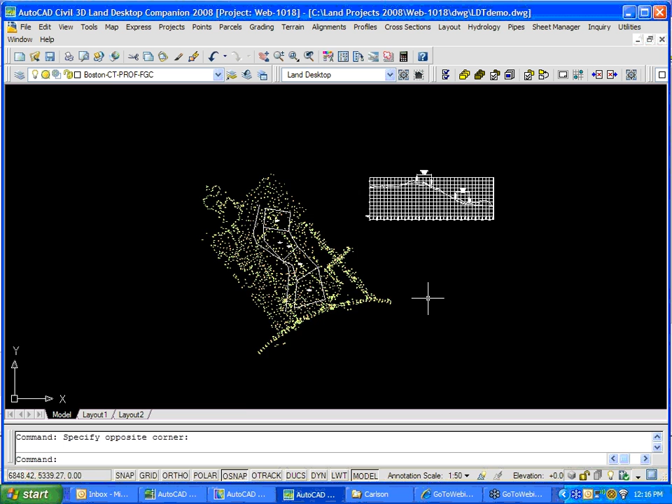Let's proceed. Where I'm at right here is in Land Desktop. I used to be Professor Landnut and spent a lot of time here and enjoyed it, but have moved on, and here is a typical data set. Very simple, but typical. What I've tried to do is represent some data, so you see the points on the screen.

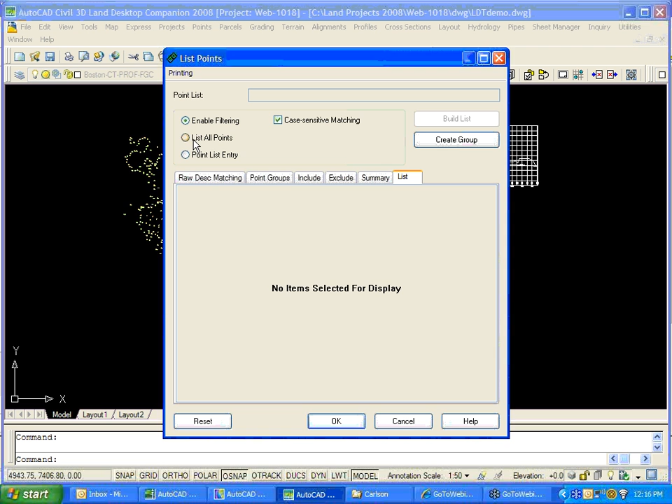If I say list points, and we come in here and say all points... okay, we're doing okay, list all points. So here's our point data.

Surfaces, we go to Terrain Model Explorer. I guess I'm still Professor Landnut, I guess once you're Professor Landnut, you're kind of always Professor Landnut. But anyway, bringing up Terrain Model Explorer here. A little bit of a delay because of all the applications I have running, but come on, you can do it, don't let me down.

There we go. Okay, so here's my EG surface. It's existing ground surface built from a point group. No problem. I have an alignment here that I put in the drawing. You can see this alignment that I put through.

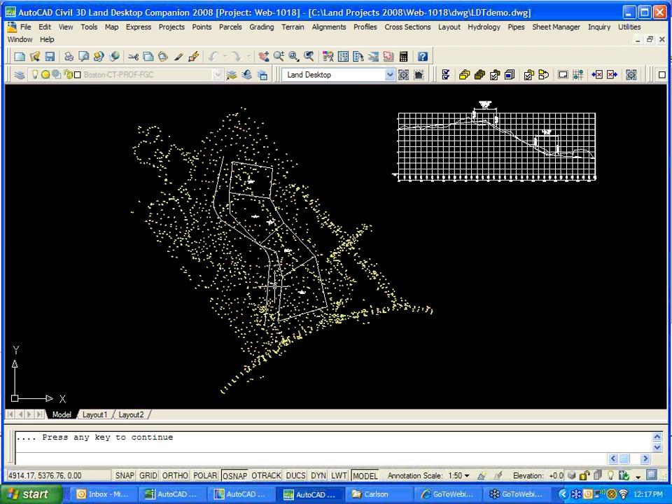Let's see, how do we list that? We say alignments, alignment commands, list defined. So there's a couple, Boston and Boston 3. We're going to go with Boston 3. I've got some parcels here, and again, let's see if I can do this.

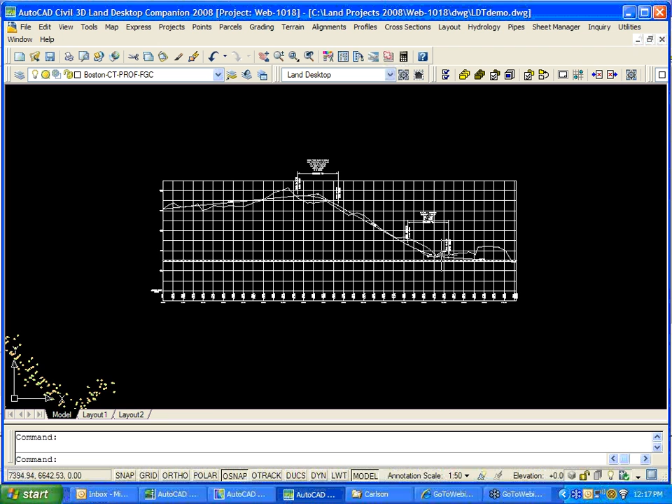Parcel manager. A little rusty, but there's my parcels, 3, 4, 5, and 6, they're numbered. And for the road, we have an existing ground and a proposed finished grade profile. So quite a bit of work that's been done here.

So here we go, here comes the magic. Coming out of Land Desktop on the project menu, Export LandXML. And we go to the LandXML export. It says I'm looking in the Land Desktop project, and I'm seeing points, the number of points, surfaces, 1 surface, 4 parcels, a couple of alignments, and I've gone ahead and said go ahead and include the profiles with the alignments. So that's all the data that we're going to be writing out.

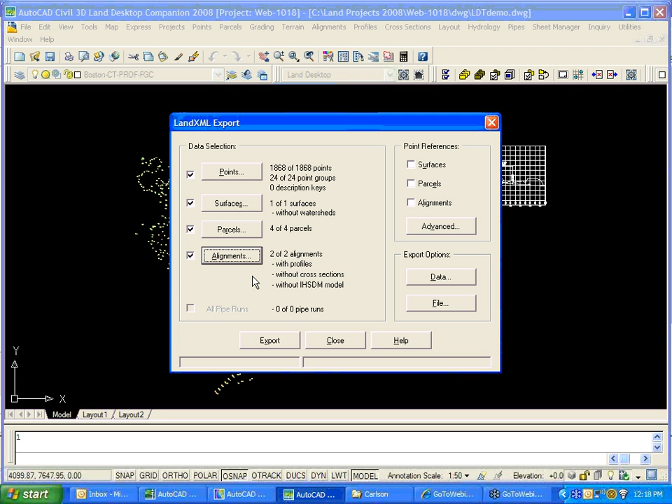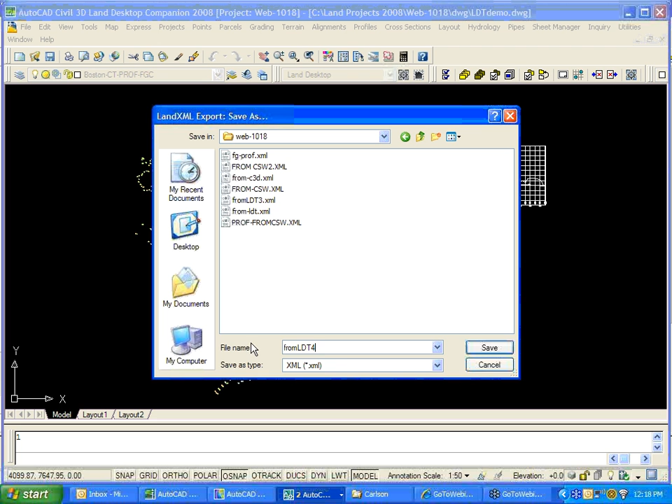So let's go ahead and say export. It says, okay, we're going to write an XML file. I'm going to go ahead and put it in a real easy place to find on my desktop. I have a Web 1018, and I'm going to call this thing from a Land Desktop, and I'm going to do number 4. I've been doing some experiments here, so let's go to number 4. This for this new one, running everything live.

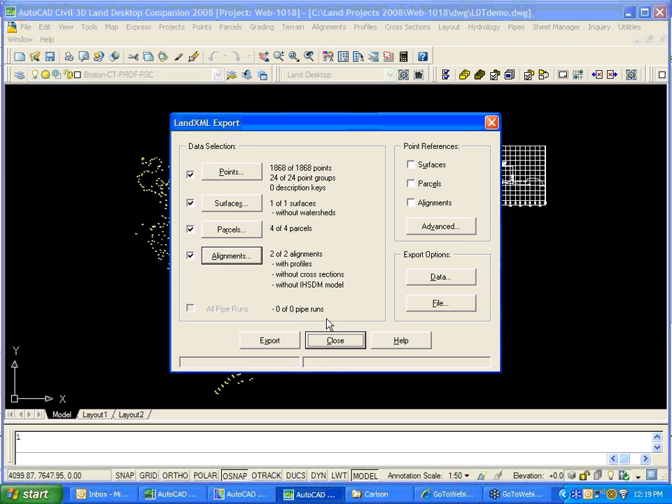For your viewing pleasure here, to make sure that this is all real stuff that's happening. Of course, we could face disaster, but we're brave, so we'll continue. So there it is, we're done. It's exported the file, and we close this dialog, and there we are. There's step 1. So any project you have in Land Desktop, there you go, there's all your data coming out of there.

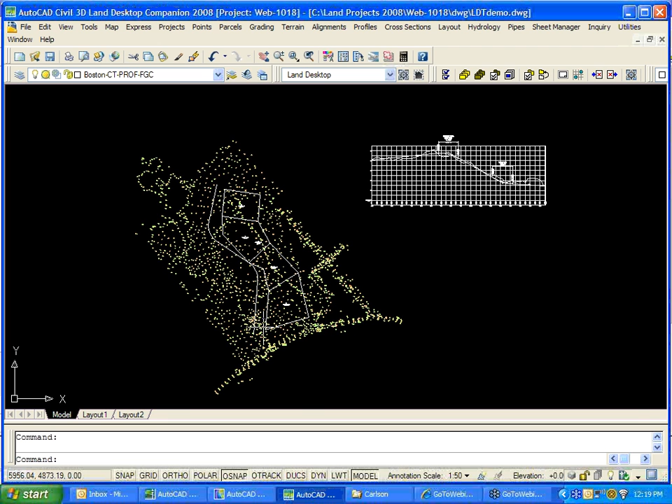Now, in addition, in Survey, let me jump over to the Carlson now, which is right here. A few things I want to point out before I actually bring in that file. First of all, in Carlson Survey, I'm just going to switch to Carlson Survey for a moment, there's a couple things I want to point out.

One of them is edit process raw data file. When you're working with raw data, survey data, this is extremely important here, is in the editor we have import and export. So you can see, I'll leave this up there for a second so you can see it, is just basically a veritable plethora of formats of raw data that we can read, of course, including the ever popular field books. So in talking about survey data, if you have an FBK, bring it right in. It goes right into our editor, into our format, which is an RW5, and you're off and running.

And of course, we can bring Land XML, survey raw data, and you see the list of all the others. By the same token, we can output a field book, export a field book, we can set up field book codes and so on, and we can export raw to Land XML, and so on, TDS format, whatever you're working with. So I wanted to point out there, major on the topic of conversion, this is a major feature, major thing to be aware of, is your survey data.

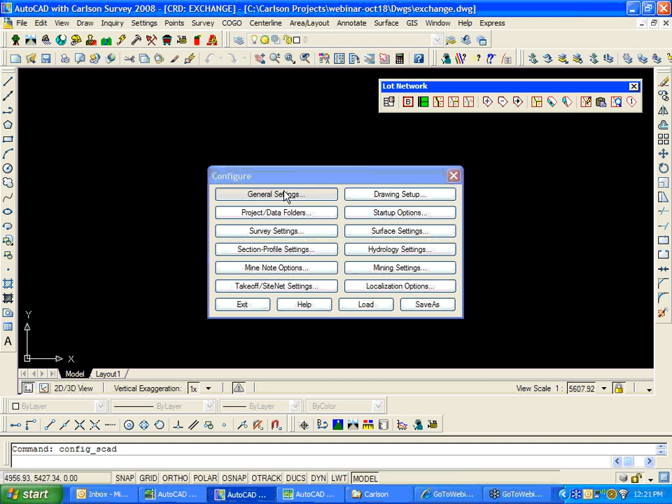In addition, there's a few other things I wanted to point out. Now, in Carlson, if I go to my settings, Carlson configure, and I go to my general settings, we have up here coordinate file format, and it defaults to our Carlson numeric only, which is a CRD. We call it a CRD, coordinate file. But you can actually run Carlson reading and writing to a Land Desktop points MDB. So if you wanted to just stick with the Land Desktop points MDB, that's an option that we offer to you, and you can just be reading and writing directly into that format.

Down here, by the way, now I'm running on top of maps, so the menus that are available are map menus. But if I was plugged into Land, or if you plug Carlson into Land, you'll see your Land Desktop menus. Or, of course, if you install on Civil 3D, you'll see your Civil 3D menus available, and you can just switch menus and go to town.

Another thing I wanted to show is under our points menu. Again, we're talking about points a little bit more. We have just an extensive list of converting formats from one to another. So here's a Land MDB to a CRD. You just pick the MDB file and make it into a CRD file that way. We can take Land Desktop points and make them Carlson points. You have the Object Enabler installed. You open a drawing, it has contours and points. We can turn the land points into Carlson points.

On the surface menu, we can, where is it? We can convert, there's that import, export surface data. Here's convert Land Desktop contours. So again, if someone's using Land it might not hurt to just maybe explode those contour objects or create them again as polylines, but you don't even have to.

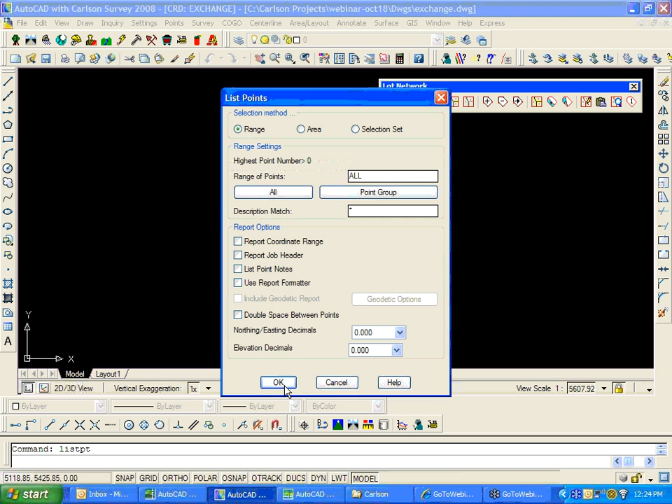If I look at my points, I say list points, all, and of course you see there's no point data. And there's no surface, there's nothing. I just created this right before we started, and it's empty. So let's bring it in, and let's see how this goes. So we're going to go to the File menu, and we're going to say Import LandXML Files, and we're going to import from LandXML, and it says, where is the file?

And again, I put it up there on my desktop so I could find it easily, so let's go up there on my desktop, Web 1018, from Land, number 4, the one we just made. It kind of shows me a preview because of course it's a text file, so all that stuff's there. So let's go ahead and open it. And we're being prompted for each file name. It shows you what data is going to come in. Okay? And point protection is on. That all looks good. Let's go ahead and start the import.

It says, what coordinate file are we going to be writing our point data to? And we're just going to use our current existing CRD, which is Exchange. We could also make a new CRD. One of the beauties of Carlson with point data is the ability to work with multiple coordinate files.

So if I wanted this data coming in to go to a new coordinate file and not add to the one, let's say I already had points in this one, but I want to bring in some more, but put them in a new one for safety purposes, I could make a new file. But I'm going to go ahead and bring them into this existing one, which again is empty. So I'll bring it in, and it processes the point data.

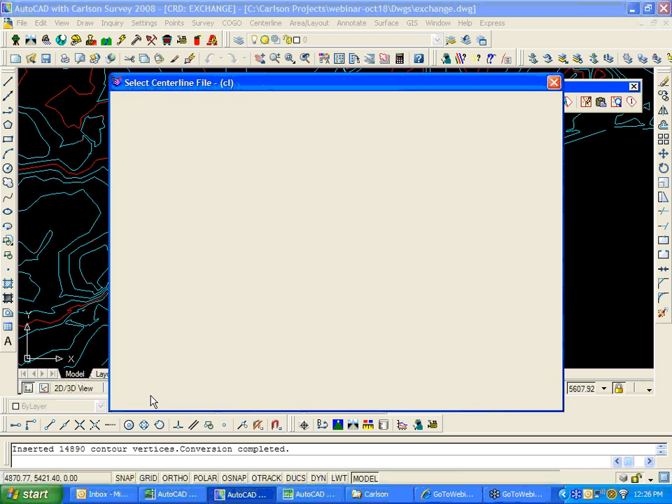And here comes some more data. So this is the other centerline file, the first one I had tried, which is just called Boston. Let's just use it. Let's just leave it alone. We're not going to go ahead further with that one.

And here comes our profiles. Again, Carlson stores these as a .pro file. So here's Boston 3, and this is existing ground. So I'm just going to change that name to Boston 3 hyphen existing ground profile, okay? And now it looks and it says I see one more, and it's the finished ground, Boston 3 finished ground.

So let's go ahead and take out all this extraneous stuff with the parentheses, which scare me a little bit. I actually tried it and it works fine, but special characters like that over the years, going back to the DOS days, those of you that were there with me back then, those special characters kind of give us nightmares, so I still avoid them. Old habits die hard. So Boston 3FG, and it processes that,

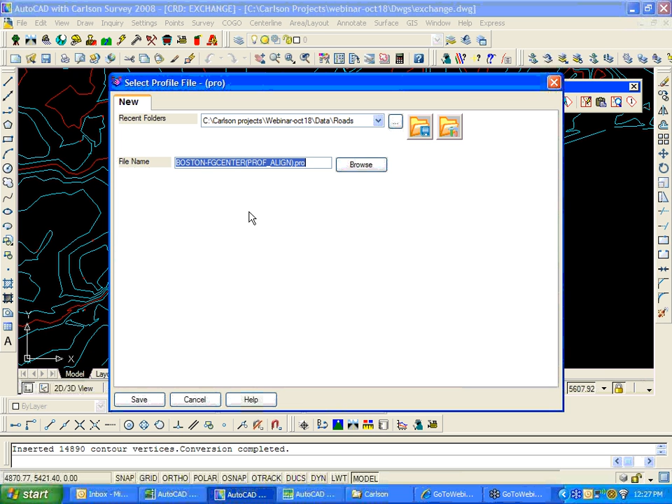and it says, okay, here's the center line for this other road, Boston. I'm just going to leave that one because we're not going to use it. Anything else? This is that finished grade for that other center line. And I think we're all set. So here we go. So here's our surface. Let's look at our point data first.

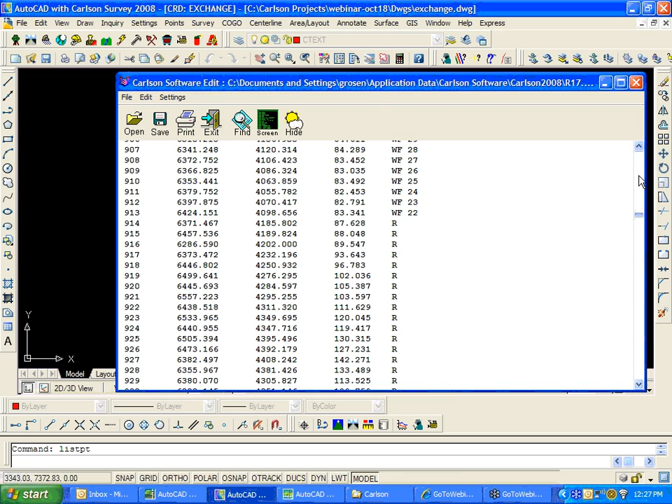We go to points, list points. I showed this just a moment ago. I now show you all the points are here. Came through just fine. There's some center line shots. Proposed center lines at elevation 0 because they're just proposed stakeout, but that's fine. Points are there. You can see the contours obviously are all set. Well, they even got labeled for us, which is kind of nice.

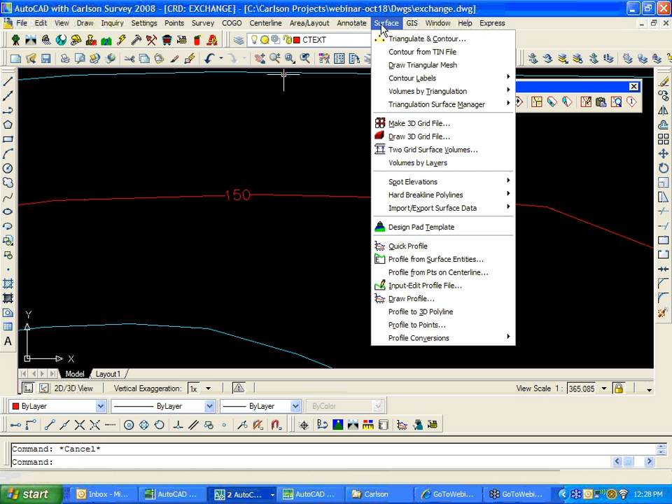Text. We have just standard text for our labels and standard polylines. This is kind of cool though. If I say on the surface menu, contour labels, and I say move along the contour, and I pick this label, and it slides along the contour. I just had to show you that because it's pretty cool. And again, this is with a standard AutoCAD text and a standard AutoCAD polyline. There's a little wipeout behind the label, but there it is, and we're all set there.

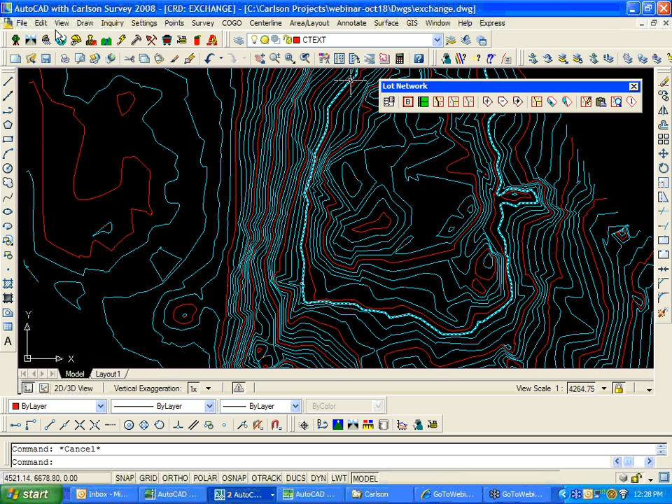Let's take a look at the surface, make sure it's real. I'm going to switch over to Civil at this point. I know the menu's a little bit better. We'll go to 3D View, Surface Viewer, and EG410. And let's take a look. There it is. Okay, so there's our nice surface. Came through just fine. Nothing to worry about. Okay, so let's see what else we have.

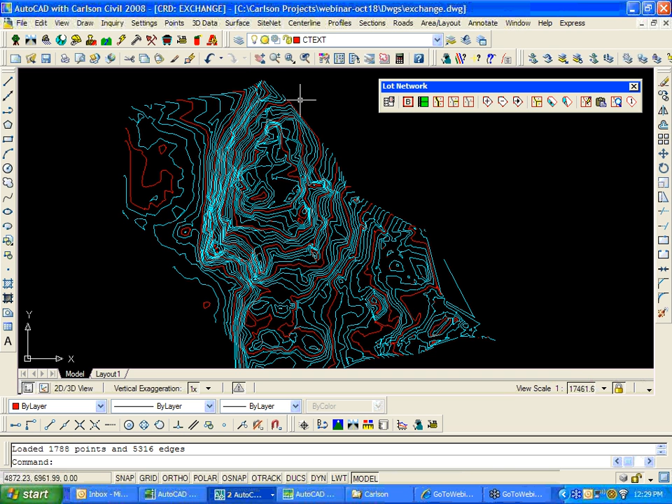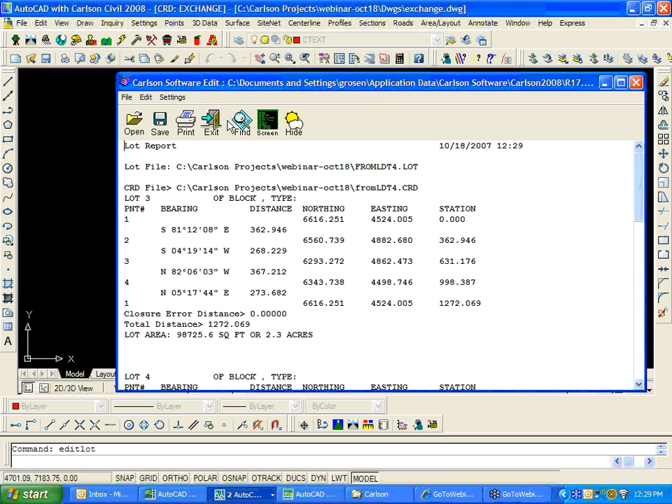We have parcels. Let's look at those. We'll go to our lot file manager, and we have an existing lot file from Land Desktop 4. It's an LOT file. We open it in our manager. Here's the lots. I could select them all. Let's do a report. Okay, here's all the lots with their data, bearings, distance, everything. And let's go ahead and draw them in our drawing. Draw polylines, label. Let's label everything. Why not as it comes in? Say OK.

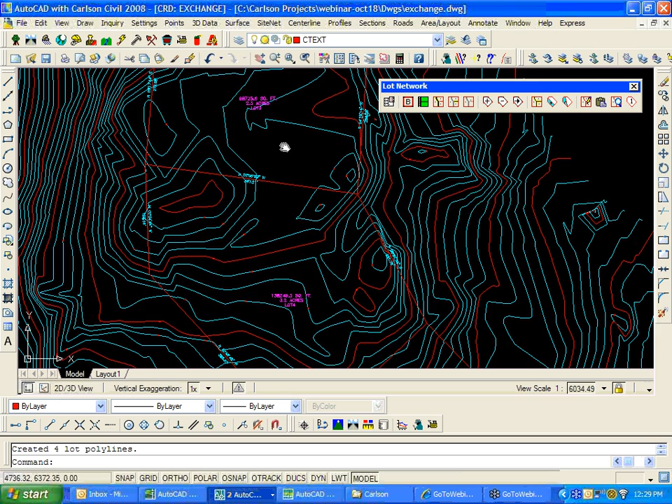And this is for the line labels and the lot labels. And we'll see those in here now. Okay, so here's our lots came through with the labels and the bearings on all the lots. So now our lots are there. That's no problem. Those came through. Let me go ahead and I think I should freeze these contours. Might make things a little easier to see. Can I do that? Well, yeah, I guess do that. Just so you can see the parcels a little better. What else did we have?

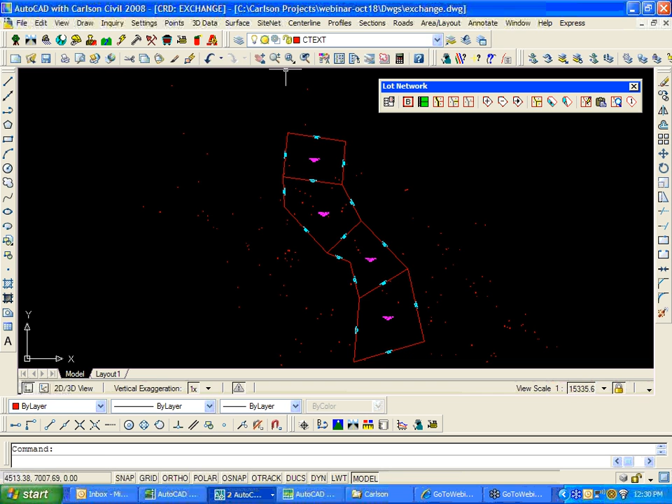Center line. Let's draw out the center line file. On layer C line, Boston 4, there's the center line that we created. If I double click on it, Carlson recognizes that polyline's a polyline, but it has data that tells us it's more than a polyline. So there it is. I have my editor. And then let's draw, we have profiles too. So let's say draw profiles.

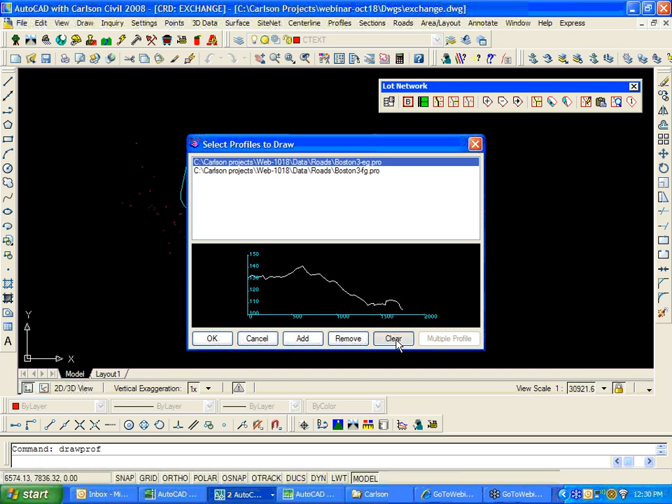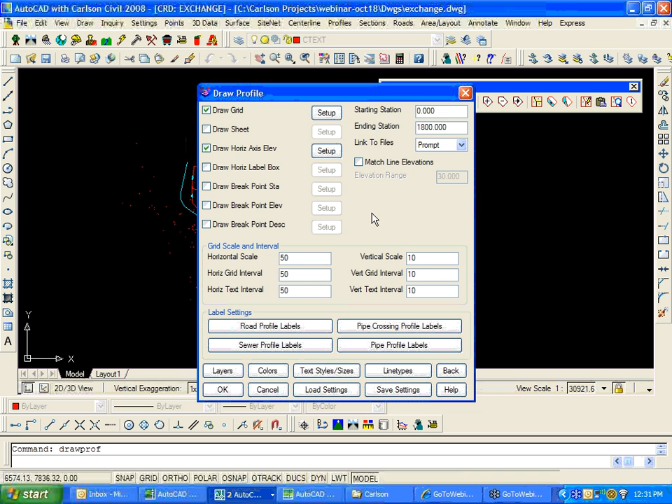And I'm going to clear this and add, let's see, where are those? Boston 3, yeah, Boston 4. The center line, I didn't change the name. So it's this one, and here's FG. So here's the existing and proposed, and here's how we set everything up, all the details, 50 and 10, and grids, and so on. I'm not going to go into those details right now. Minimum, maximum, and so on. We'll draw that on the screen. And there's our profiles generated.

So there you go. Everything really just came through flawlessly, and that's just the way it works. I'll go ahead and save the drawing. So coming from Land, that whole data set comes into Carlson, and we're all set.

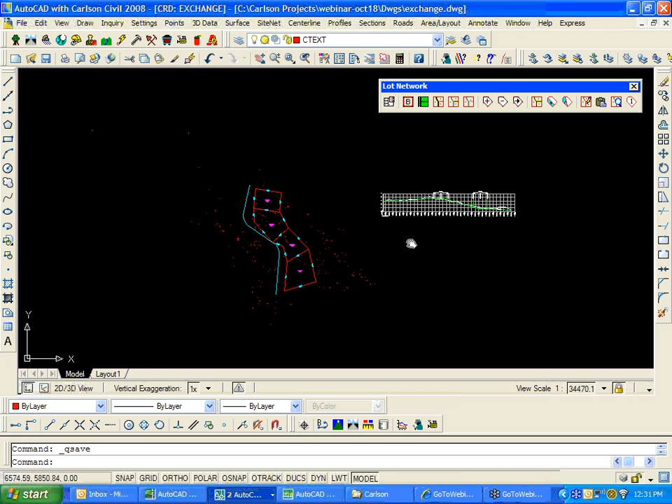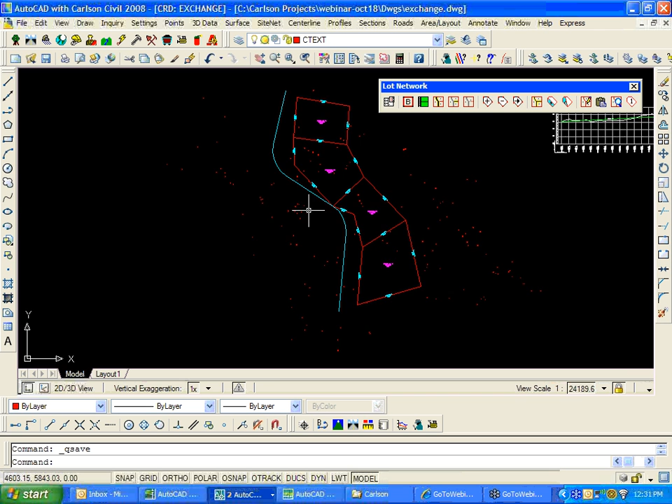Let's do this. While we're here, what time is it? 12:30. Here's the steps I'd like to take. I'm going to add another road, make a road network very quickly for you. Some of you have seen this before, but we'll just do it again real quick, and we'll make a surface, and then we will save everything, and we'll export out of Carlson an XML, and let's bring that into Civil 3D, and then we'll try and take some questions. So I'm going to go ahead and ignore these lots for now.

I'm just going to erase them right off the screen because I want to put a road over there. And we're just going to pretend that that's not there. Let's set this layer as current, and we'll draw an AutoCAD polyline from near right here. And let's just come over here like that.

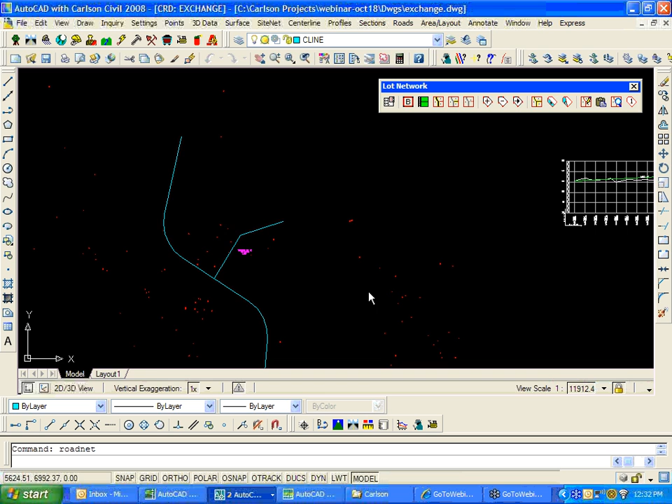And now let's go to our road network, because this is kind of cool. We can add another road. So let's make a new RDN file. The file name will be, let's call it exchange. I like that, exchange. That's a road network file. Okay. What's our target surface? Our target surface will be existing ground 4.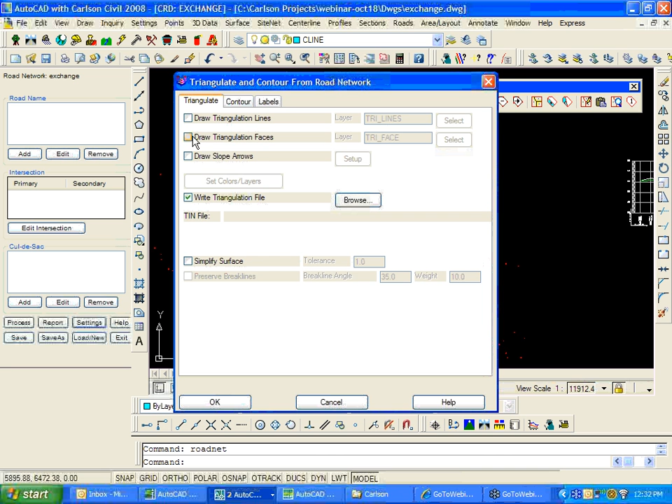And we're going to output a surface, triangulate and contour. We're going to output a surface. Let's skip the faces. No, let's draw the faces. And we'll use colors of the template components. We'll write out a TIN file, which we'll call road net. And let's call it 4 so that we know which one it is. Let's go ahead and draw contours.

Don't need labels. Now, another very exciting thing that we can do with Carlson is in this 2008 version, we can write a SurvCE file, a single file, and have this entire road network available to stake out in SurvCE. That's our data collection software that runs on your data collector in the field. The new version is 2.02, and it can accept these files. It's an RNF, a road network file.

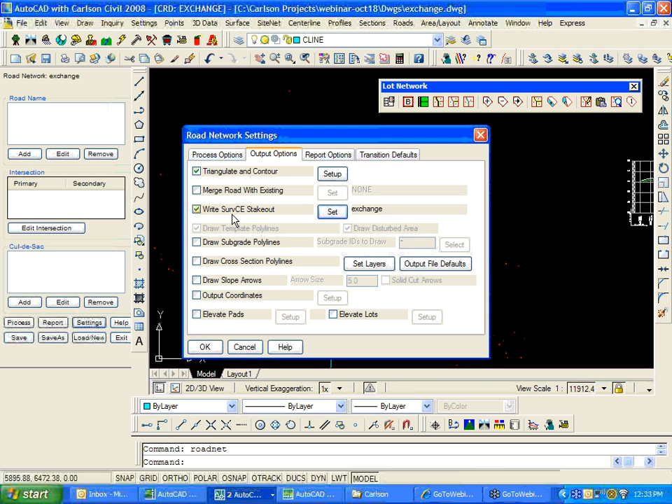Let's call it exchange, so we keep track of these names, and let's put it in our Carlson webinar October 18th folder, so we remember where that is. And we're going to write this entire network out. Again, talking about exchanging data, this goes right out to SurvCE, and you take it in the field and stake out the whole network. It's quite extraordinary. Okay, so those are our output options.

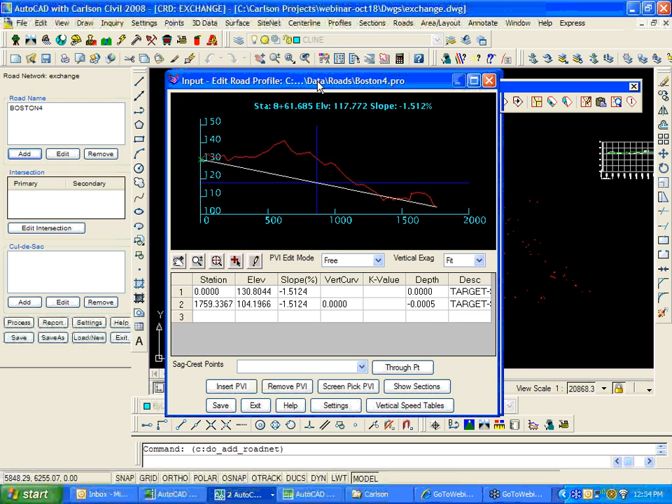So let's add our roads. The first one is a centerline file. It's called Boston 4. And the profile, we'll make a new profile. And that's fine. The centerline we're fine with. The profile, let's edit it. It samples existing ground. It shows us where we are in the profile. Let's throw in a PVI. I'm going to do this very quickly because it's not the focus for today, but I just couldn't resist. I had to have a little fun here.

So we'll throw that in. Let's throw in another PVI right here. We'll do another 120-foot vertical curve. There we go. And, of course, if we want to move the vertical curves, we just drag them and drop them wherever we need to. If you haven't seen that before, it's amazing. And please look at the webinars on that for more detailed information.

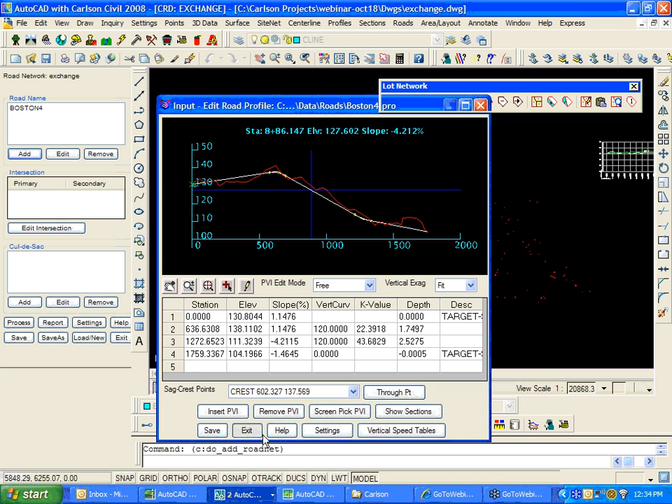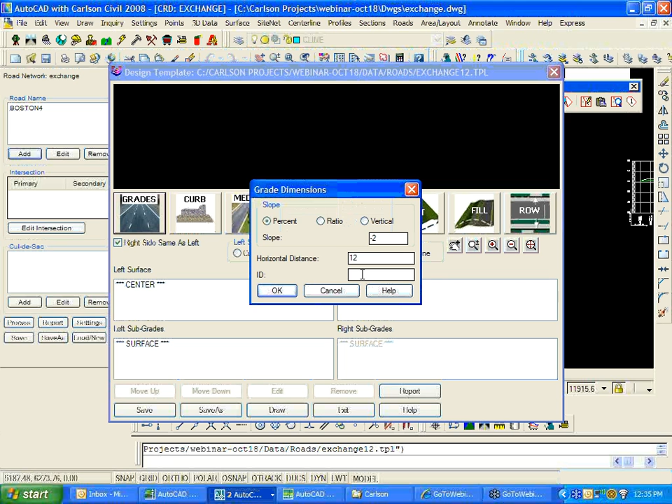But let's proceed. The template we're going to use, let's make a template. We'll make a new one: exchange 12-foot lanes. Let's go ahead and edit that template. We'll put in 12-foot lanes with a -2% cross slope for 12 feet. We'll call that the lane. And let's just throw curbs on here, and then let's just do cut and fill from there. Okay, so we'll keep it super simple, but that's basically how we make templates. More complicated is just as easy.

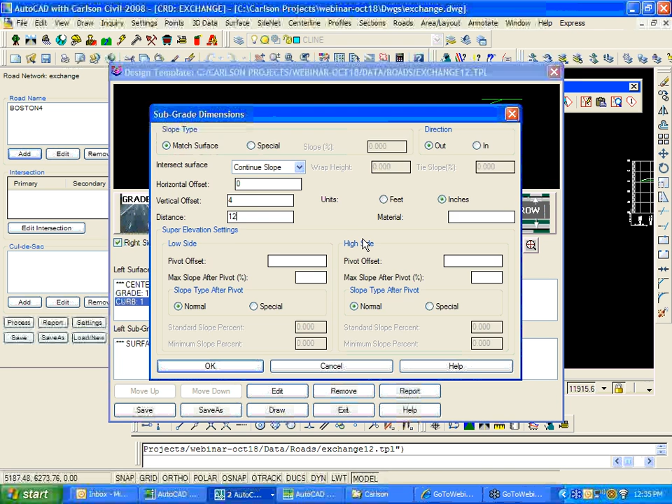Let's put a subgrade. You're like, well, what about a subgrade? Okay, 0, we'll make it 4 inches for the full 12 feet of asphalt, and so on. So there's our template with our asphalt stuff, just to show you. So we'll save and exit. So now we have that. So now let's process this road. Okay, we process the road, and we get the whole grading of the road, and so on and so forth, of course. All done.

Now let's add the other road. Screen pick this polyline here. Give it a name. Let's call it Boston 4B, for lack of a better name. We'll make a profile for it. Let's edit that centerline and fit a curve. What should we put in? A 100-foot radius curve. What's that look like? That'll work. Save and exit.

Let's look at the profile. Okay, notice it ties into the other road because it knows it needs to. That's quite a bit of cut there, so let's throw in a PVI with a 120-foot vertical curve. Make it fit the ground a little. Let's move it up a little bit. Push it up here a little bit, somewhere right in there.

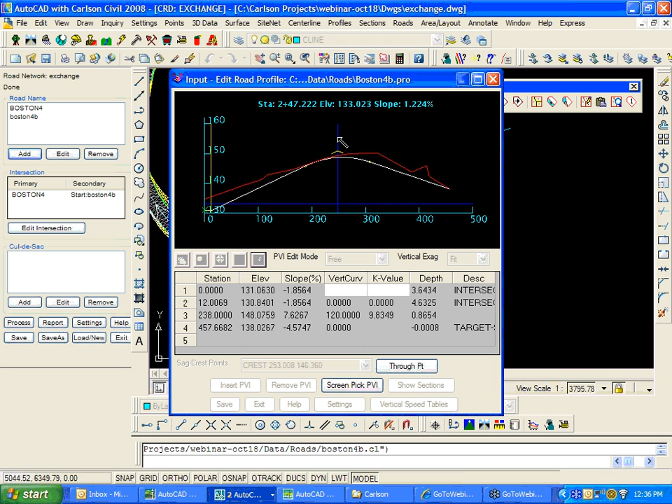That'll do. Again, not focusing on that today, but you get the idea. Use the same template. Process the two roads together, and we now have the road network forming with two roads, and we just add them from here. Totally 3D. I'll say cube, all, and you'll see the road network in 3D with the intersection all graded and so on.

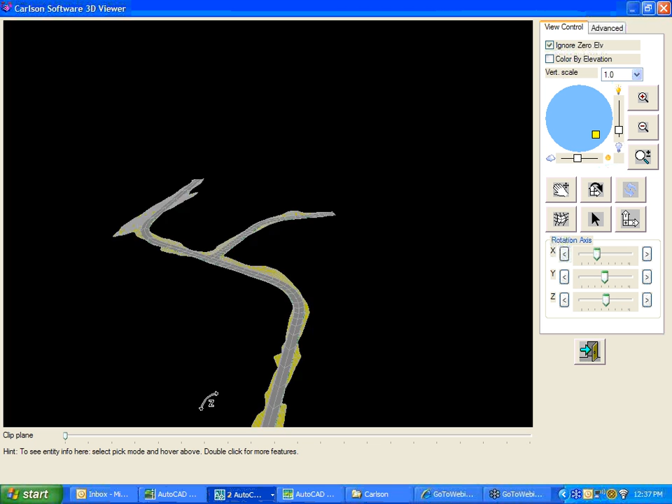Pretty cool stuff. So the first road came from Land Desktop, bring it into Carlson, add a second road, and now we've got a surface of it. We've got that external file that we've got. So let's go ahead and save and exit. Okay, and we'll save our drawing, and let's proceed. So let's take this out of Carlson and go into Civil 3D.

Okay, so File, Import, Export, Land XML. We're going to export, and we have current drawing data files, and we have project data files, and we can just select any assorted data files. Because I haven't made a project specifically, which I can go back and do, probably work with the current drawing because we know which files that we've worked with.

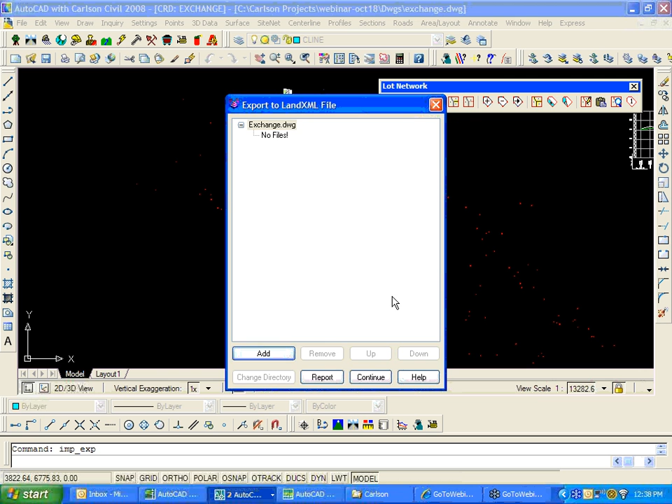So it says you're going to make an XML file. Let's make a new one, and we're going to put it up here on my desktop, and we're going to call it Exchange 4, just so again we'll use that number 4. And it doesn't recognize the files, so we'd have to add them. Well, let me back up here, and let me do this. I think we should do this.

Let's say Project Explorer, and it says, what's your project file? Let's make a new one, Exchange. And let's add a drawing to this project. So we're going to go to Carlson Projects, and the project that I'm working in is called Webinar October 18, and the drawing I'm in is called Exchange. Now when I tell it to use that drawing, it finds all of the associated files.

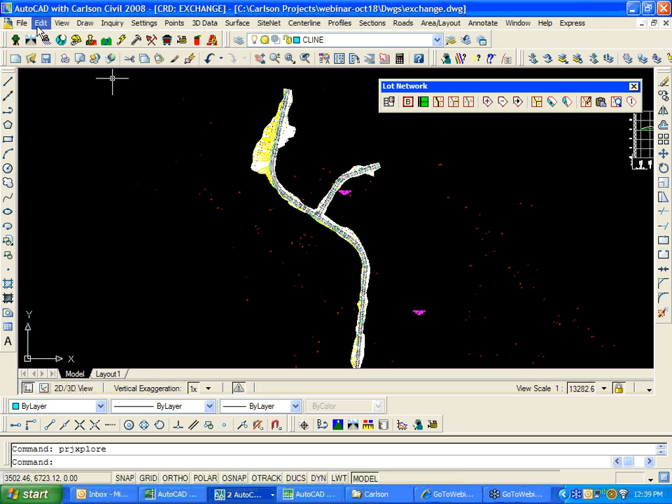So now when I do export, and I say export to Land XML, and I say use the project data files, let's use this PRJ file, and we'll export to an existing, which we call Exchange. No, we make a new one, I guess. Exchange, I guess it didn't save it, Exchange 4. Okay, and now it has all of the data files that are associated with this drawing.

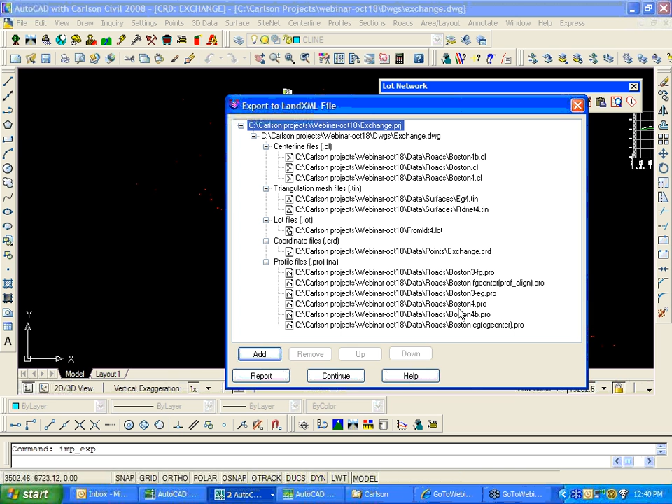Okay, so I just needed to take that step of setting up a Carlson project. Again, they're optional for all the work we do, but in this case, it was beneficial to go ahead and do that. So we continue, and it says create assignments, centerlines, profiles, and cross-sections. We'll just continue.

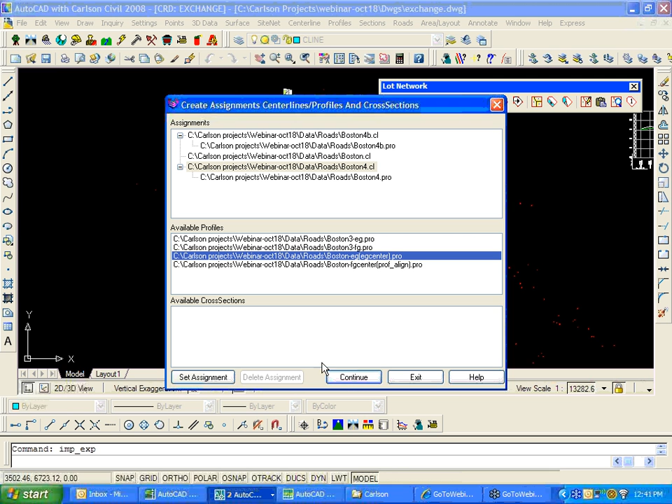Okay, continue now. So let's say Boston 4 CL, and we set it to the 4 and this one. Set assignment. Okay, oh, I see. Boston 4 profile, Boston 4 CL, Boston 4 CL, 4B. Now I'm getting confused with all my naming here. 4 CL is this one. And I think that's it. Okay, so let's do that. And go ahead and export all of these files.

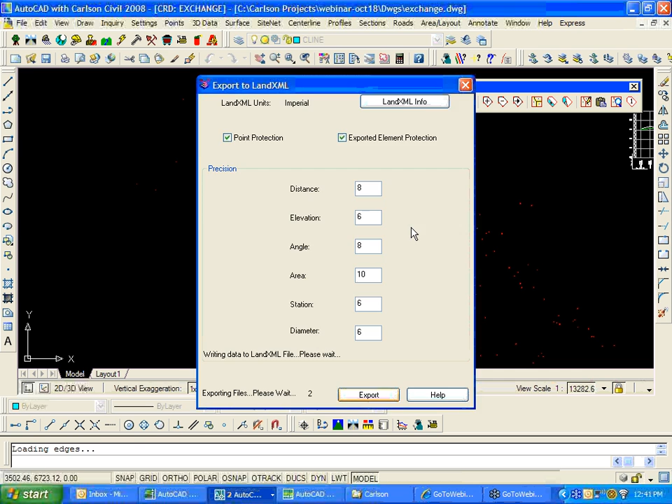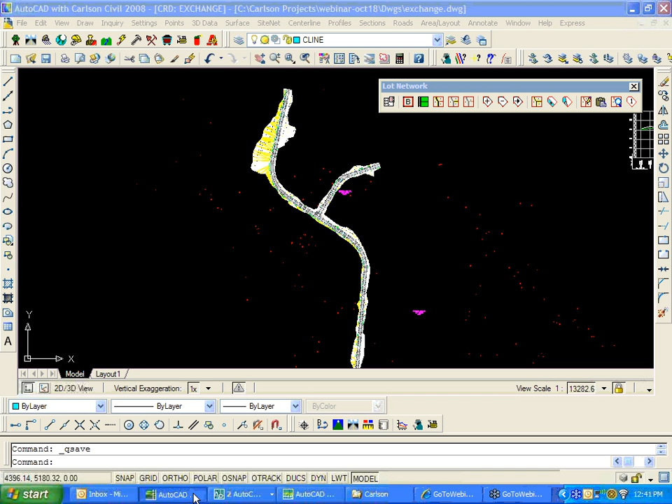Okay, so there's our file. So let's save our drawing, because we need to come back, and let's jump over here to Civil 3D. I've got a new drawing I just started right before the webinar, and I used a template, the LDT template actually. So we've got some styles and so on, and we're just going to go right to importing, and we're going to import Land XML.

So we'll go find our file. There we go. And Exchange 4 is our file. And we have points, parcels, alignments, and a couple surfaces. Interesting. So let's proceed. See how we do. Okay, reading all that data. And, okay, those look fine.

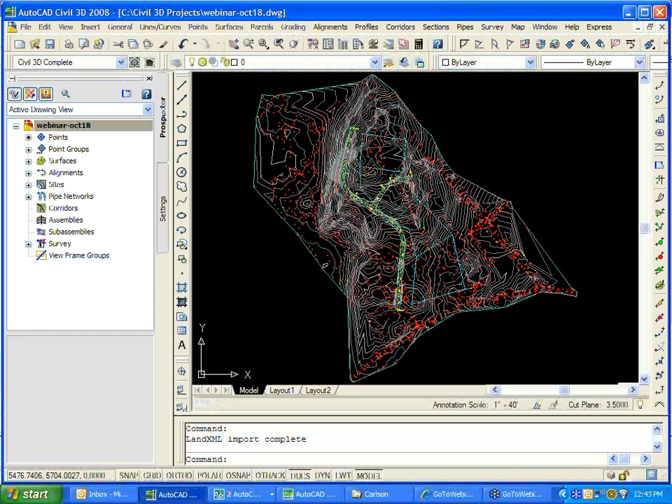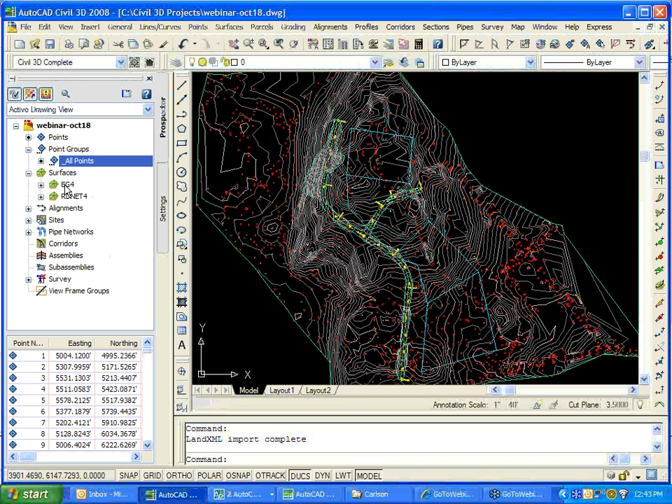We'll close the panorama. And here we are, Civil 3D, and there's everything. We've got our surface. You can see we've got our points. Let's take a look. There's our point group, all points, of course. Our surfaces. We have the road surface and the existing ground surface as well. So here's that entire road surface that we generated out of Carlson.

That's kind of cool. We could look at that in orbit. Should we do that? Let's take a look at that and say 3D orbit. And take the whole thing. Well, that's okay. Orbit this thing into this view and right click and conceptual.

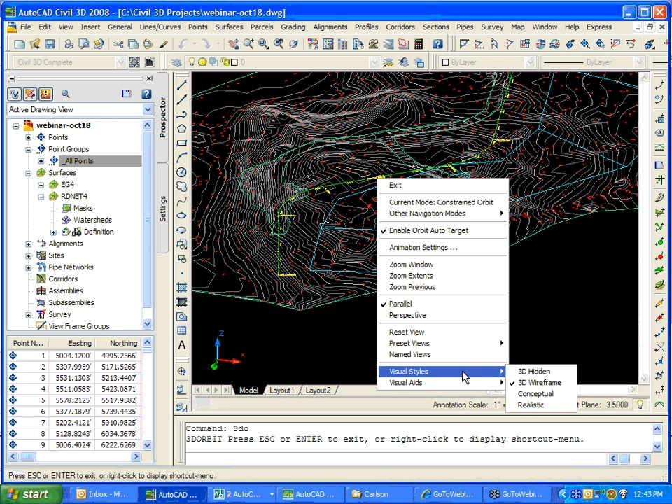Go. So there's our surface. And we've got our road surface in there and everything. Okay, so just kind of interesting. Okay, preset views, back to the top preset view, and let's do shade mode. There's probably a better way. Someone out there is going, no, don't do it that way, but this works. Shade mode, 2D, back to 2D wireframe.

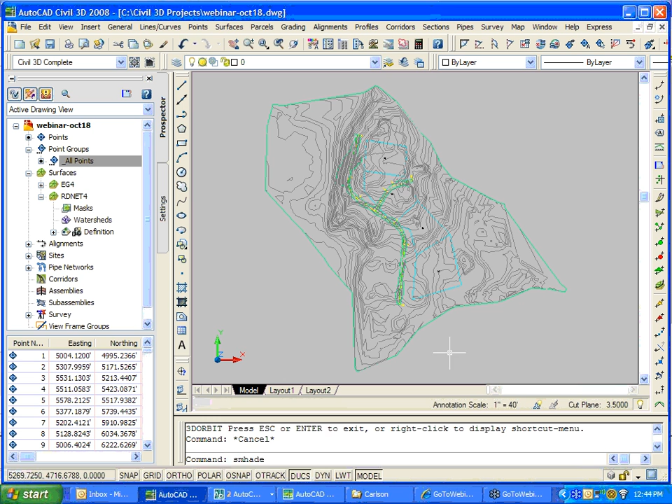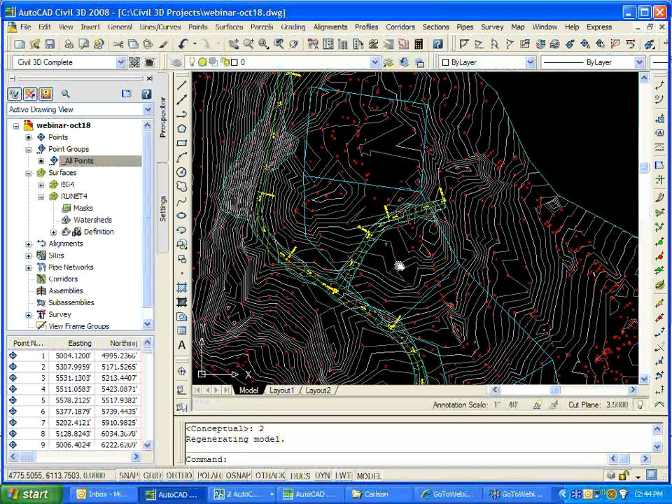There's our center lines, all stationed as centerline objects in Civil 3D. There's our parcels. Under sites, we have our site 1 with our parcels. There's all of our parcels. And I think, what else can we do? We can do, under alignments, we can do Boston 4. Oh, that's right, the 2 roads. Okay, so let's do profiles.

Oops, I don't want to export yet. And we could draw them. Oh, it's over here on the profile menu. Create profile view. Rusty here. And Boston 4. Let's see if this works. Next, next, next.

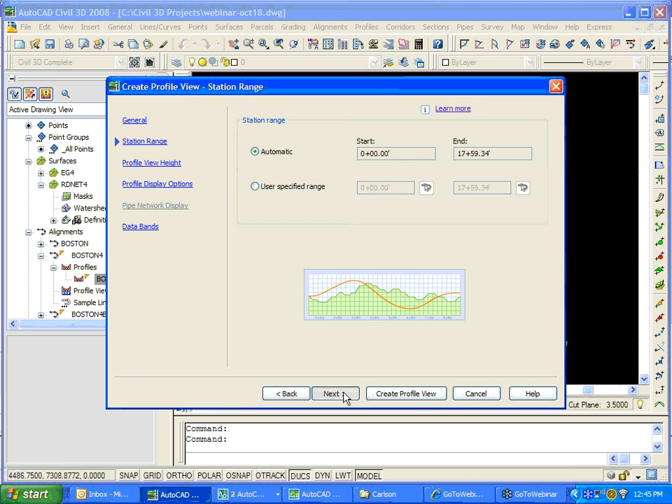Oh, and we only have finished ground because I didn't do this. That's my mistake. But anyway, let's just show you the profile view. And there we go. There's our profile view for the proposed. I just missed the existing. That was my mistake. But the point is made. From Land Desktop, take all this data, XML it over.

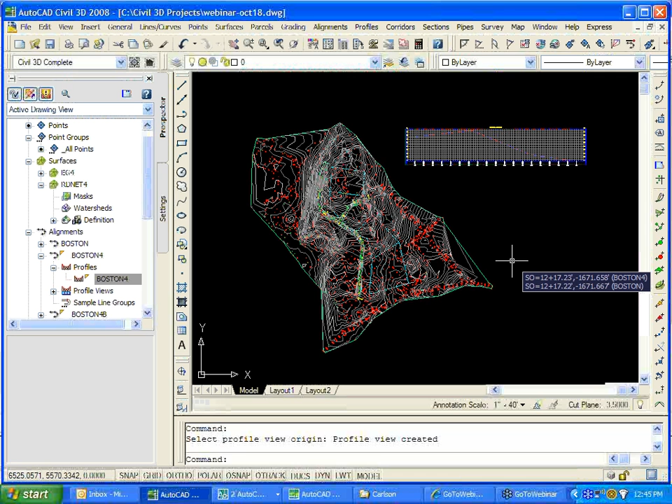So Carlson DWG can be opened in Land or in Civil 3D. Added another network, built a road network, and so on. And then into Civil 3D, everything's here, exchanging. And obviously work here, XML it back to Carlson, back to Land, of course, if necessary. It's all there. It's very easy to do, and that was really my point.

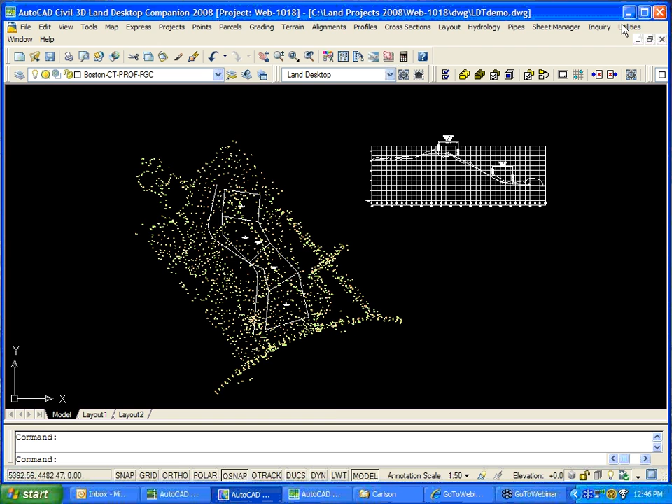Now, let me show you if I have time. One more thing, if I can pull this off here. I'll try and be brave and try one more interesting thing for the SurvCE users. Here's my SurvCE demo. This is the desktop version. And let's make a new job, and we'll make it an exchange CRD.

And let me just make sure that you're seeing this. Let's see, audience view. Yeah, so it's very small for you actually to see. But basically this, and I can't move it, this is our emulator on the PC. But basically, the idea is I can come in here and view this entire road network in SurvCE. And it's so small on your screen, I can't make it any bigger. I don't think I'm going to proceed with this.

Let me go to the questions and see what I can do there. But basically, the idea is that I can bring this entire job in. So I would go to Roads, and I would say, take the road while I go find it. Go up, up. Carlson Projects, web. Let me just show you this. Web. Oh, here's the RNF file right here. So we load it, and I say select a RoadNet element.